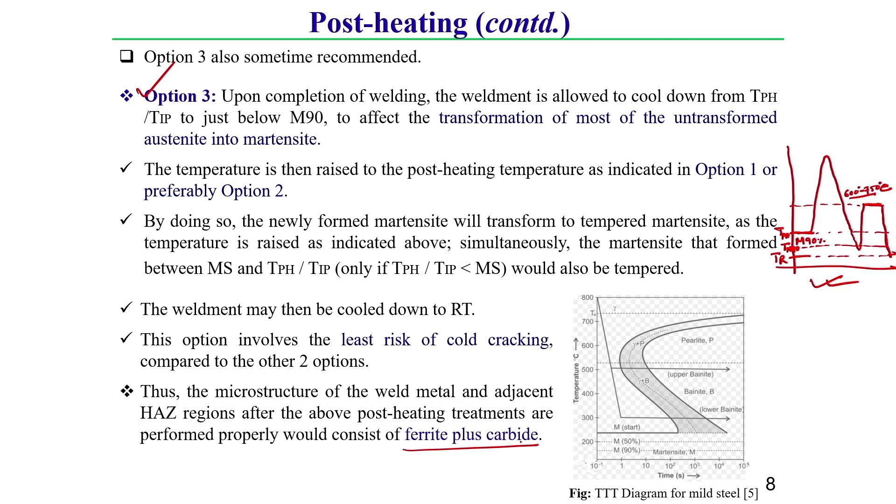So that overall martensite we now temper at about the post-heating temperature or 600 to 750 degree centigrade. All the martensite will be tempered, and due to this tempering it is converted to a ferrite and carbide structure. So the final structure from this heat treatment process will be ferrite plus carbide.

Now we will discuss the stress relief heat treatment operation, one of the most important applications to relieve residual stress induced in welded specimens. Stress relief treatment is defined as the uniform heating of a welded structure to a suitable temperature, holding at this temperature for a predetermined period of time, and finally followed by uniform cooling.

This stress relief treatment is usually performed below the critical range so as not to affect the metallurgical structure of the workpiece. We carry it out below the lower critical temperature, meaning below the recrystallization temperature, so that the metallurgical structure is not affected.

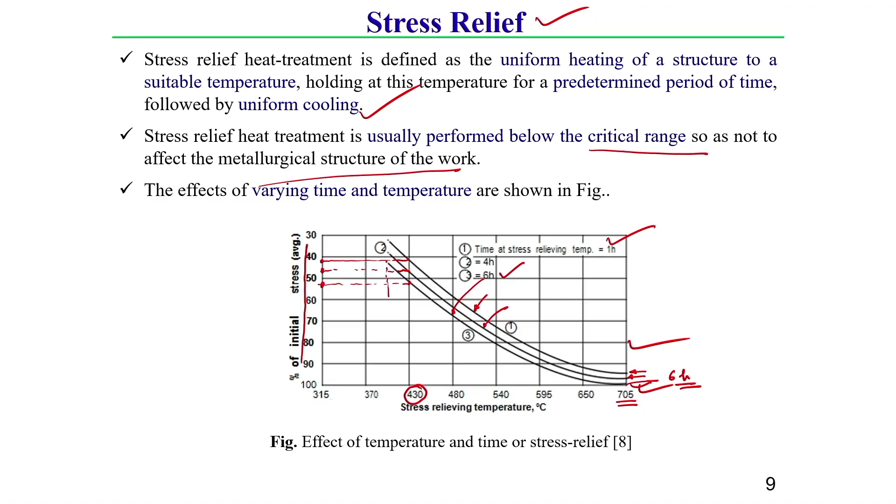So, what we can observe from this curve is that by increasing the post heating temperature and holding time, we can relieve the residual stress from the weld specimen drastically. Both time and temperature have an effect. For a particular temperature, once we increase the time, the percentage of reduction of residual stress increases. And for a particular time, if we increase the temperature, the percentage of reduction of residual stress will also increase. This you should keep in mind.

Now, I will discuss stress relief in a little more detail. To reduce this high level of residual stress in a weld specimen, the component is reheated to a sufficiently high temperature, though below the recrystallization temperature. As the temperature is increased, the proof strength falls, allowing deformation to occur and residual stress to decrease until an acceptable level is reached by holding for the soaking time.

The component would be held at this soaking temperature for a period of time until a stable condition is reached and then cooled back to room temperature. The residual stress remaining in the joint is equal to the proof strength at this soak temperature. This you should keep in mind. What does it mean? I will explain in detail here itself.

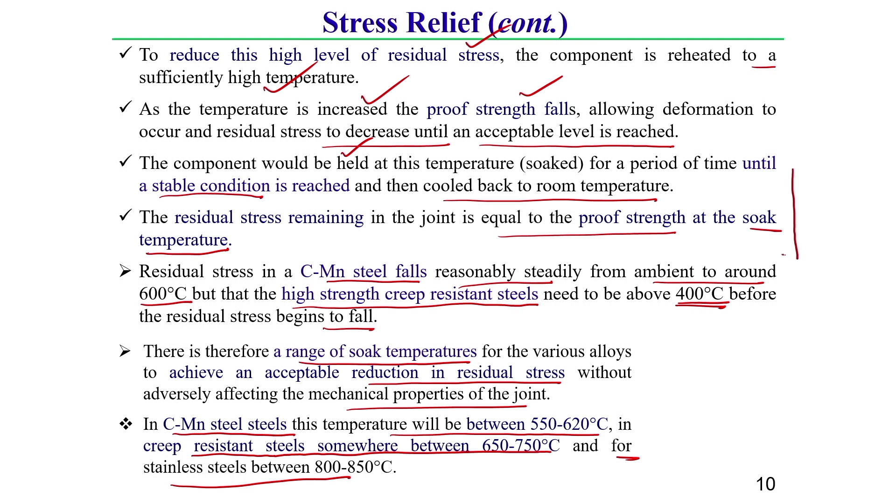Proof strength, what is proof strength? You know very well. In case of some material, proof strength means, this is the stress strain curve of a material. Proof strength means for 0.2% strain level, this is your strain, this is your stress. If we draw a line which is parallel to the initial tangent, where it cuts this stress strain curve, whatever the stress is there, this stress is called generally

sigma proof stress. That means at 0.2% strain level, if we draw a line which is parallel to the initial tangent of this stress strain curve, then where this 0.2% line is cutting the stress strain curve, whatever the stress is at that cutting point, that stress is called proof stress. So, in some material this is generally called 0.2% yield stress also.

Okay. Now, you should always keep in mind, proof stress generally depends on temperature. So, let this be your temperature, and this is your sigma proof. One thing you can observe is that with increase in temperature, generally this proof stress decreases.

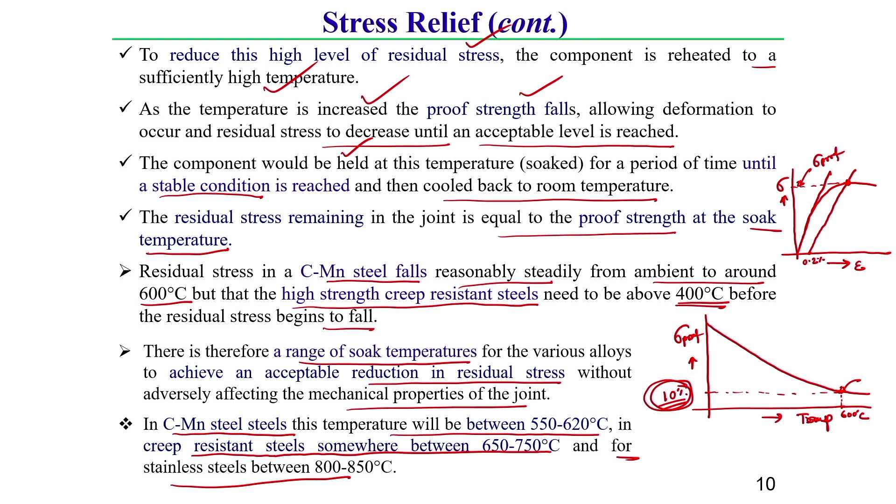So, at this temperature level, that means if we raise the weldment specimen to a temperature of this level, then whatever the proof stress will be at this temperature level, that proof stress magnitude will remain as a residual stress after this stress relief heat treatment operation. Understand what I am telling? You should keep this in mind.

Okay. Now, why is this stress relief operation required? A little bit in detail I am discussing here. Generally this stress relief operation is performed because, first of all, we know that the high residual stress which is locked into a weld joint may cause deformation outside acceptable dimension to occur when the item is machined or when it enters service.

So, due to this, stress relief operation is required to minimize this residual stress, because if this residual stress is there, then once we machine that component or once we use it in a service condition, due to this residual stress some deformation can occur which is outside the acceptable dimension. You should keep this in mind.

Apart from this, if there is a high residual stress in a weld specimen of carbon or low alloy steel, then it increases the risk of brittle fracture. So, if we do this stress relief operation, this risk of brittle fracture we can eliminate. Apart from this, if we remove this tensile residual stress, it also reduces the cause of stress corrosion cracking. This is another phenomenon you should keep in mind.

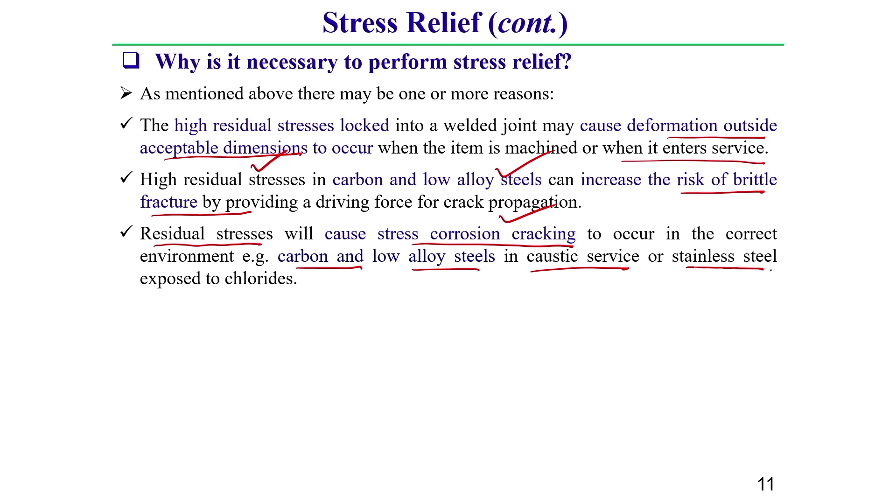Generally if there is a high residual stress in a weld specimen, then there is a chance of stress corrosion cracking in some particular medium. For stress corrosion cracking to occur, high residual stress is required, and for carbon and low alloy steel it requires a caustic type of medium, and for stainless steel it generally requires a chloride type of medium. If this medium is there, then due to this high residual stress there is a chance of stress corrosion cracking. So, once we mitigate or minimize this residual stress in the weld specimen, there is less chance of stress corrosion cracking in your weld specimen.

Some other heat treatment processes also we need to discuss. What are those other heat treatment processes? One is called annealing, another one is called normalizing, another one is called tempering, and another one is called aging or precipitation hardening heat treatment operation. Briefly I will discuss these heat treatment processes also. Though you are very well familiar with all these heat treatment processes, you should still know a little, because this is also sometimes required in case of weld specimens.

So, what is annealing operation? Annealing is generally a high temperature heat treatment operation. This process requires heating the material generally above the recrystallization temperature. You know, for mild steel the recrystallization temperature is 723 degrees centigrade; it should be above that temperature, and we should hold this temperature for a particular time before cooling, then cool slowly. We generally do this type of annealing operation in a furnace.

This is often carried out generally to soften the hardened material. One thing you should keep in mind, a fully annealed structure, a fully annealed component, gives the very softest microstructure. You should keep this in mind.

It also results in reduction in both yield as well as tensile strength in case of ferritic types of steel, and it also reduces the toughness. Here one thing you should keep in mind: in full annealing of carbon steel, we generally slowly heat to a temperature of about 50 degrees above the austenitic temperature, that means above the austenitic temperature we further heat within a range of 50 degrees centigrade, and after that we hold this temperature for a particular time, that is why it is called holding temperature, and then cool down slowly to room temperature.

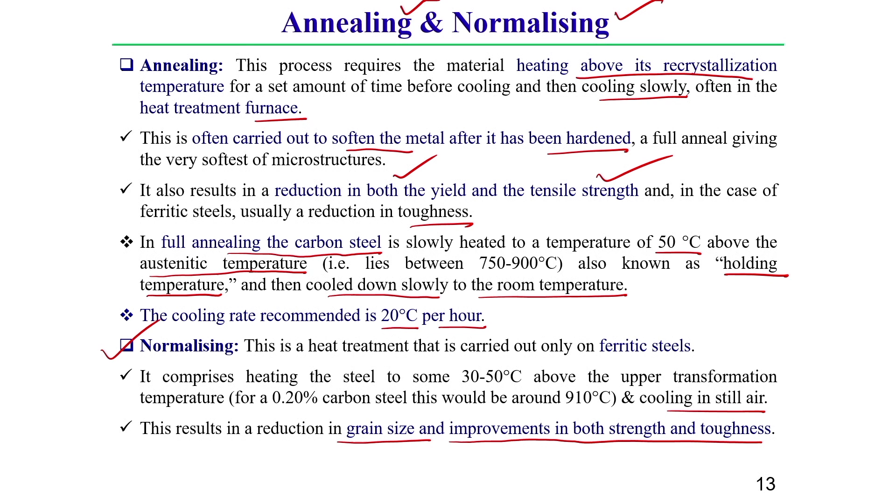This results in a reduction in grain size, and also it improves the strength and toughness of the structure. So, this normalizing operation is a heat treatment that is also generally carried out in case of ferritic types of steel, this you should keep in mind. This normalizing operation generally reduces the grain size, that means it refines the grain size, as well as it improves both strength and toughness.

Another two heat treatment processes I am going to discuss now, one is called tempering and another one is aging or precipitation hardening. So, what is tempering? Tempering is a heat treatment process which is generally carried out in case of ferritic types of steel at a relatively low temperature compared to annealing or normalizing heat treatment operation. Here the temperature is below the lower transformation temperature or lower critical temperature. In a conventional structural carbon steel, this would be within a range of around 600 to 650 degree centigrade, this you should keep in mind.

Due to this tempering, generally hardness is reduced, its tensile strength is also reduced, but this tempering operation improves ductility and toughness. So, most normalized steel, whatever steel is normalized, generally requires to be tempered before welding. So, before welding operation, whatever normalized steels are there, you need to temper them, after that you should go for welding.

Apart from this, whatever quenched steel is there, that quenched steel is also generally first quenched, then tempering operation is required, after that we do the welding operation. That is why here I have written all quenched steels are used in quenched and tempered condition, this also you should keep in mind.

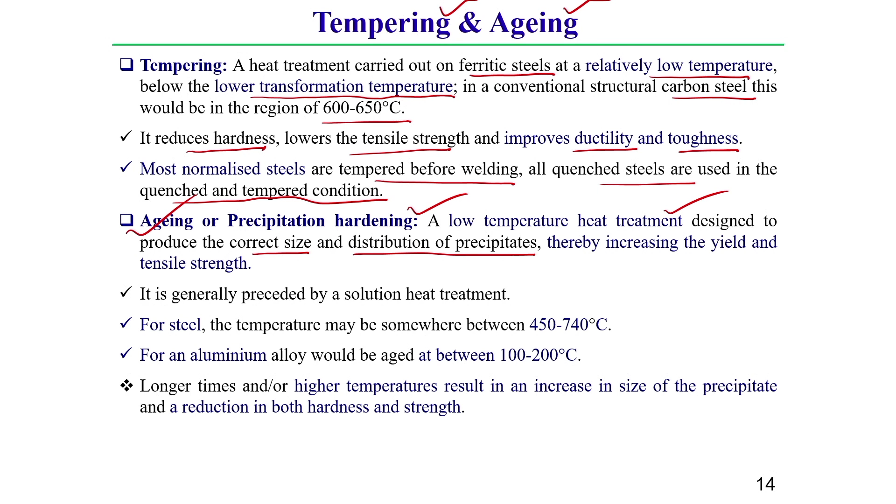Now, aging or precipitation hardening, this is also a very important heat treatment operation. It is also a low temperature heat treatment operation which is designed to produce correct size and distribution of precipitates. What are precipitates? Precipitates are tiny, small second phase elements. This element can be aluminum, copper, or it can be nitride types of structure, or carbide types of tiny particles. It is a second phase type of structure.

So, by aging or precipitation hardening, we produce the correct size and distribution of these precipitates. Once we do this, it increases the yield and tensile strength. So, to increase the yield and tensile strength, aging or precipitation hardening is generally required. This age hardening is generally preceded by a solution heat treatment.

For steel, this heat treatment temperature is somewhere between 450 to 740 degree centigrade, whereas for aluminum this temperature varies within a range of 100 to 200 degree centigrade. Here one thing you should keep in mind, the longer the time of this age hardening, or the higher the temperature, results in an increase in size of the precipitates, and if the size of the precipitates increases, it generally reduces both hardness and strength.

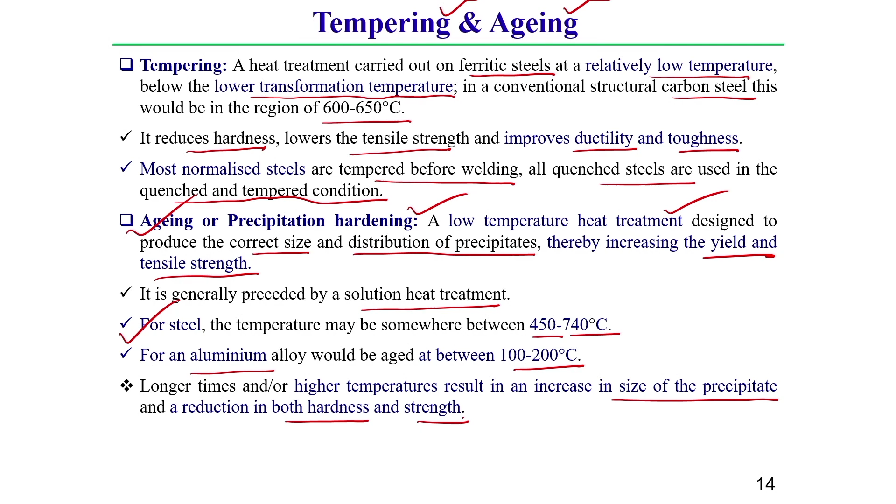So, this is all about different types of common heat treatment processes which are used in welded specimens. In the next lecture, I will discuss the different types of heat source models we generally use for doing thermomechanical analysis.